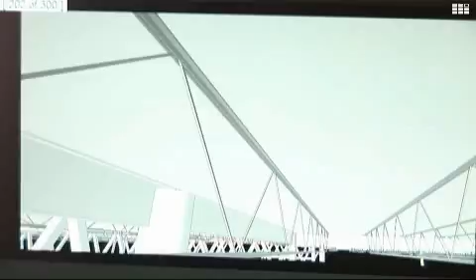Structural engineering is the process of designing the components that are required to support a building, whether they be columns or beams, foundations. It also applies to other types of structures like bridges or retaining walls, anything where we're trying to resist the forces that Mother Nature is imposing upon us, like gravity or soil loads or something of that nature.

So much these days talked about going green. Can you tell me about your involvement with the environment and how you try to make things better? We have on staff an engineer who is LEED certified. In the structural engineering field, it is not as prevalent as it is in architectural or the mechanical engineering field, but we feel very sensitive in the fact that we can offer some of our suggestions which will help provide a LEED certified building.

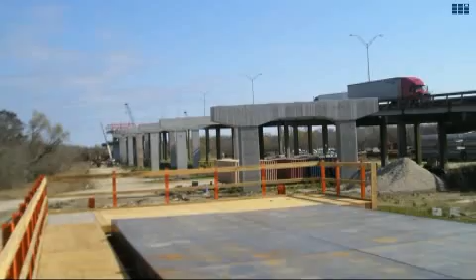When I got out of college, I worked for a construction company working on bridges, and then when I came to work here, I spent some time working on buildings. It's the size of the loads - in a building you have people, you have wind. In bridges you have trucks and other heavy vehicles. As a friend says, the loads are real, they're not imaginary, they're real. That the bridge will carry what you think it will, and that can be problematic.

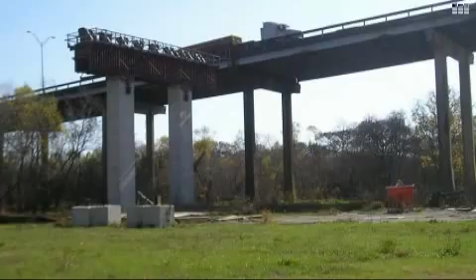In the last couple of years, we've done several interesting bridges. One was for the city of Fort Worth that was very standard construction, but it was to a new site. The city needed access, oddly enough, to one of their landfills, and they just needed a new route in because our old route was becoming too expensive. We had to get over a creek and up to the top of the landfill. We also, in the last couple of years, have done a fairly long railroad bridge that matched a twin structure. It was a portion of a project that won a design award.

What about bridges in an actual body of water? How do you actually know how deep to go? We would get information from a geotechnical engineer. They would go out, do a series of borings, and tell us what's down below grade. The couple of bridges I mentioned, we didn't have that problem, we could span across. An issue though is if you're actually building in the water, how do you construct it so that you can do it in the dry?

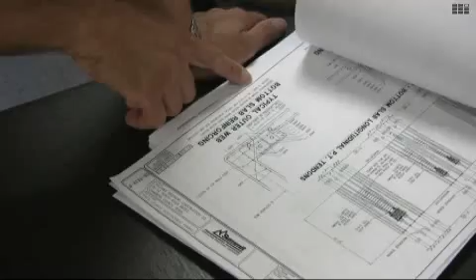We have, for contractors over the years, done what are called cofferdams. They're basically steel-walled structures that you have to brace to hold the water out, and we've done that on a number of occasions. Basically you drive it into the ground, you put support in, and then you pump it dry, so you have a dry workspace surrounded by water.

We've worked with Six Flags for about the last 12 years. We've been the project engineer for all the major rides and attractions they've put in that period. We work with the ride manufacturers to design the foundations and the buildings necessary to integrate the ride into the park.

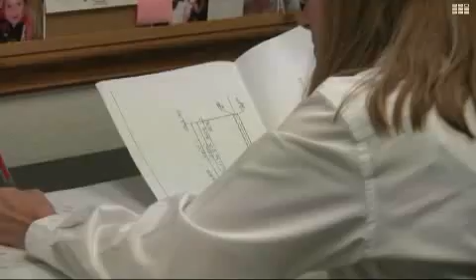We take their information and design all the components to support the ride. We're in the design phase of the project. From the inception of the project to when construction begins is when most of our work is done. During construction, we go observe the process to make sure it's being done the way we designed it. One of the things about engineering that I enjoy is that we get involved in all fabrics of society.

I'm standing in front of what's called the horse fountain, a recreation of a fountain built many years ago by the commissioners for Tarrant County, simply to provide water not only for the populace but for horses as well, which brought the produce and people to the courthouse to do their business.

We get involved in maintaining the courthouse that's behind me as well. We've just been up in the clock tower to look at some issues to make sure that the tower is being maintained properly so it doesn't deteriorate further.

Clients will hire us to go out and take a look at the different phases of construction. They want to know that as the building is being built, the contractor is building it the way we've indicated on the drawings and the specifications.

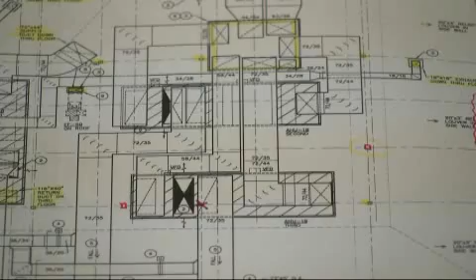I do some of the larger projects, maybe some of the hospital work that we do here, strip shopping centers that have multiple buildings in them, one that had like 5 anchor stores, so they were all large buildings, interspersed with smaller buildings.

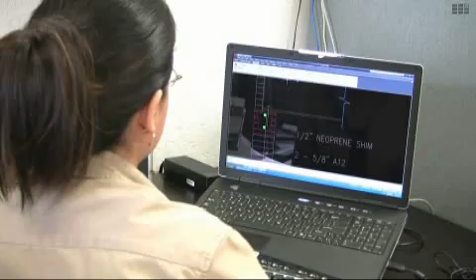Hospital work involves a lot more mechanical systems. All the medical gas piping, all the rooms have plumbing in them, so you have all the plumbing coordination, and depending on the structural system, if it's a concrete pan joist, you have to lay the pans out so you're not interfering with the function of the rooms, since a shower pan has to be in a specific spot. So you want to lay out your framing so you're not forcing them to move.

BIM, Building Information Models, is that right? What is that all about?

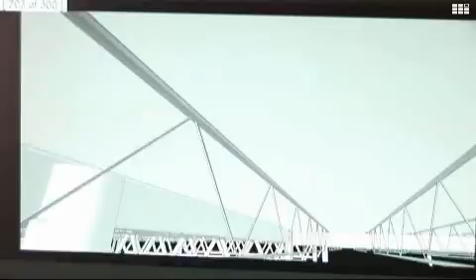The next technological phase of both structural engineering and design of buildings is going to be what they call building information models. This will incorporate the collaborative effort of all the design entities to create a model. Although it's on computer, it'll be something as if you were actually building a stick figure of the building and all the pieces within it.

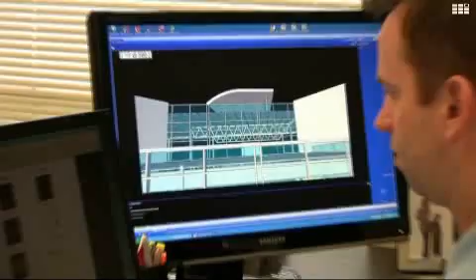It's a system by which all the design groups will offer their information and create this model, and through this effort the building will essentially be built in the computer, and the contractor can take that model and use it for his actual construction as well.

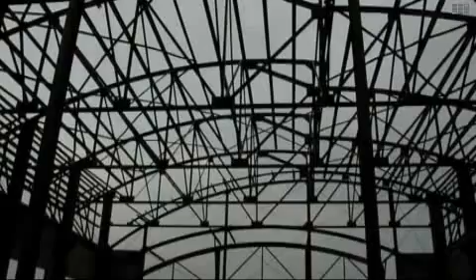There are different components to the building: the steel frame, the foundations. We pick out the best building systems for it, and we look at the loads required for that building, the wind loads, the snow loads, whatever the local codes require.

We design the steel deck, the steel beams, the columns, the drilled pier foundations, all the components of it, how they go together to form an overall solid structure.

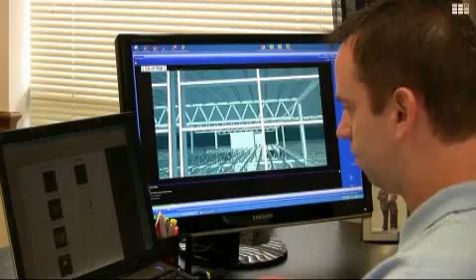We make sure that there's absolutely no possible way that what we're designing could be susceptible to failure. We don't just design it for the minimum criteria. We look at the circumstance, anything that could possibly happen, and design the foundations to accommodate any circumstance that could come along.

The goals in the future for the company show through the years, that of integrity, service to our clients, just helping them in whatever way we could, as well as developing relationships with our clients, because I believe that's very important to be able to, at the end of the day, not just produce a good product, but also have a relationship with our clients in a way that they know we support them, not just professionally, but also on a personal nature as well.

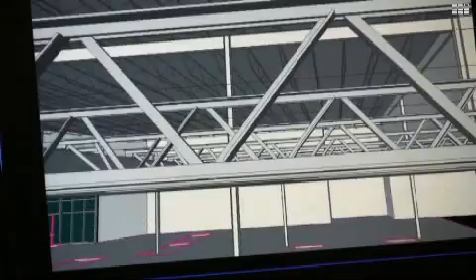Frank Neal and Associates, an amazing story, an outstanding legacy.